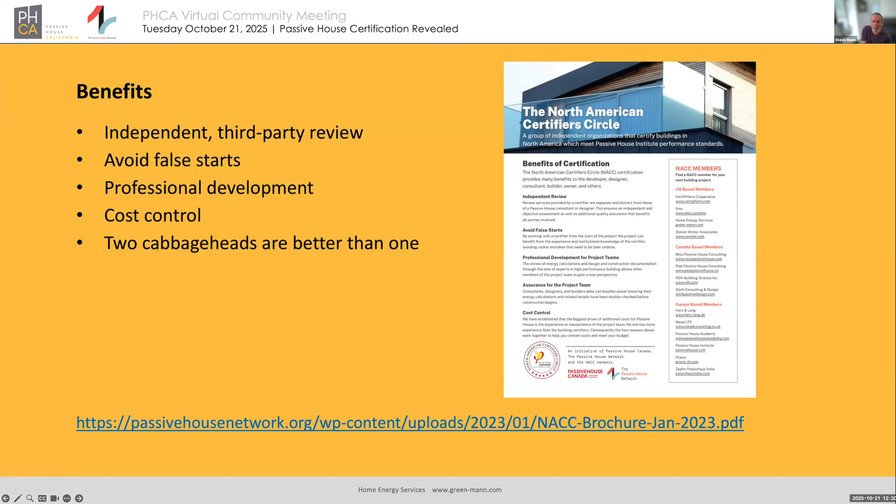Okay, the players — I've already mentioned it. There's a homeowner, that's usually who we contract with, because again, we're a third party arm's length relationship. There's going to be at least one designer or architect, there's going to be the nerd, the PHPP creator, often called the consultant, but they don't have to be certified or trained in anything — if they know how to do it, that's fine. There's going to be a builder, there's going to be subcontractors, and then there's going to be a certifier.

This is something I'm presenting in terms of how I like to operate. Every certifier is different. The way I like to operate is to have one primary point of contact so that I'm not talking to six different people to collect what I need. That doesn't mean I don't talk to everybody on the team if necessary, but I don't want six or eight people sending me documents, because chances are they're all going to send me the same stuff, and then I have to weed through it. So I like to have a manageable process. That's one thing that makes this go smoother.

We get involved typically at the very beginning, briefly. We take a quick look at the project, and this is where we can do value-added engineering and a certain amount of guidance. We are not designers; we don't get involved as designers, but we can get involved at schematic design to assist if people want that. If you really want to get formal, we can do something called a design stage assistance letter, which is basically a formal letter saying, okay, I'm a certifier, I've looked at all your plans and what you've got, and if you build the building according to the documents I looked at, it will be a certifiable building.

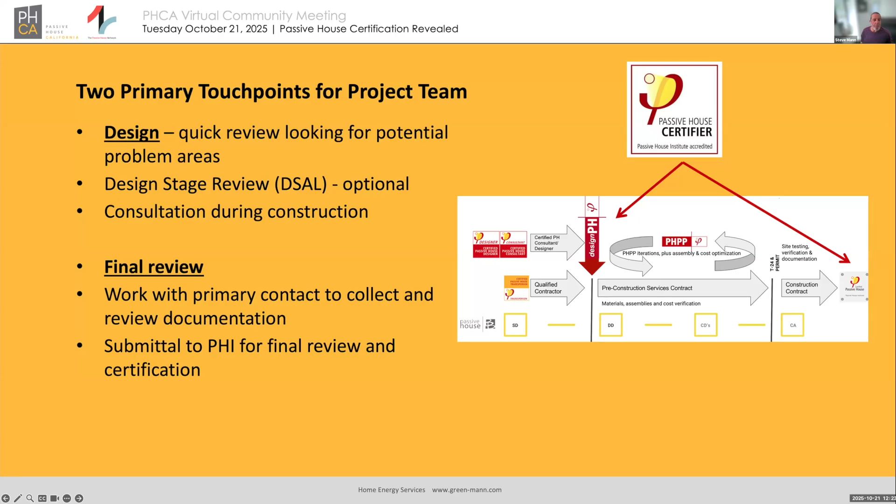Let's talk about the big lift, the documentation requirements. There are basically six categories here. If you want to find out more, you want to download these two links. One is the building criteria—this is what you have to do in order to get a certified project. And then the second one, the Passipedia document, gives example documents, these are submittal requirements.

Question from Vincent: are we more involved at the design stage for a remodel, e.g. to provide pre-certification? No, not really. Most of my projects are new construction. I've got a couple of remodels I'm doing, and the amount of involvement as a certifier is about the same. It's not a big difference, really. I'm trying to think if that's a false statement, but no, I think that's a pretty accurate statement from my experience.

My remodel experience is limited. I'd say maybe 1 in 10 projects is a remodel. I'm doing 2 retrofits right now, maybe 3, maybe 4—I have to go back and look at my project list. So yes, I am doing some.

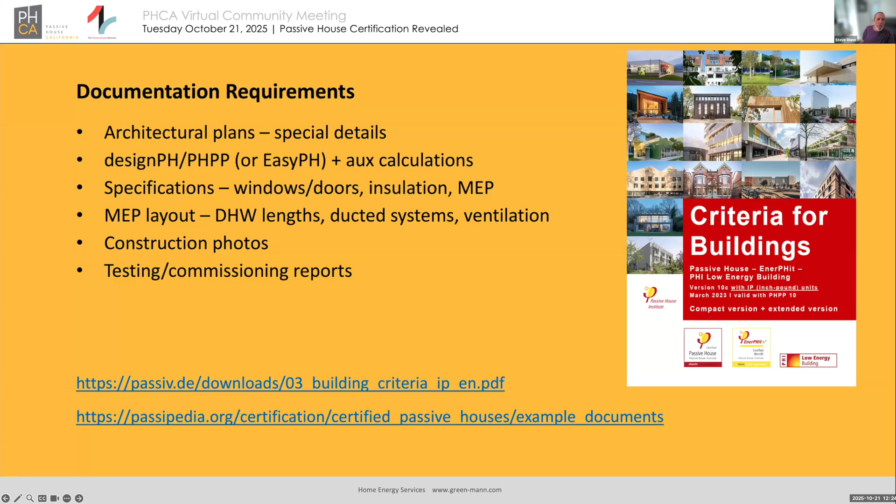Okay, documentation. That's one thing. I'm just going to go through this. There's the documentation, there's the modeling plus auxiliary calculations, there's specifications, there's a bunch of MEP stuff, construction photos, and testing and commissioning reports. Those are the categories of things you need to submit to a certifier.

Okay, architectural plans. The site plan has to have—and again, these samples I'm showing are from this second document, the Passipedia document—so you don't need to study these slides, there's more information in the Passipedia document. I'd recommend you download it and read it.

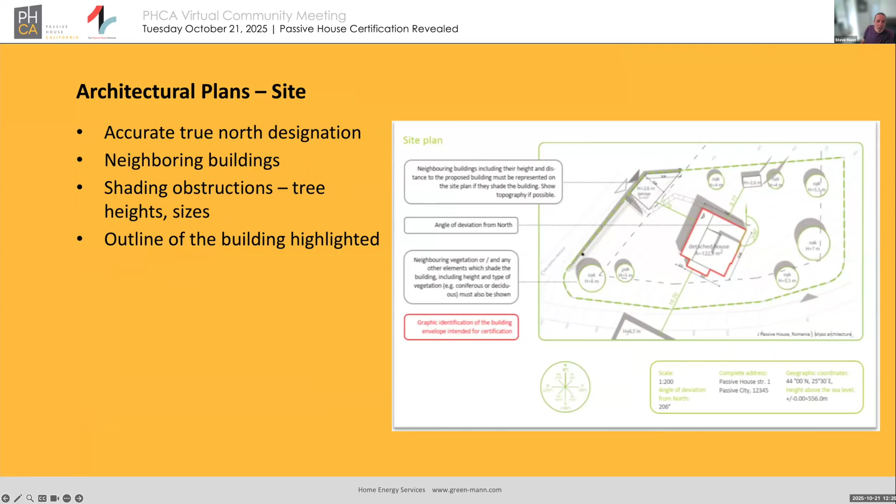Okay, you have to have a true north designation. You have to show neighboring buildings. You have to show shading obstructions and an outlining of the building highlighted. For the floor plans, you need to outline the thermal envelope and the air barrier, and we typically recommend you do it in separate colors and identify them.

Okay, and this is just one sample. We would like to see dimensions for the thermal barrier because that's really what we measure when we're certifying a building, and that's what the consultant should be measuring. Sometimes you get that, sometimes you don't. As a certifier, you learn to deal with it.

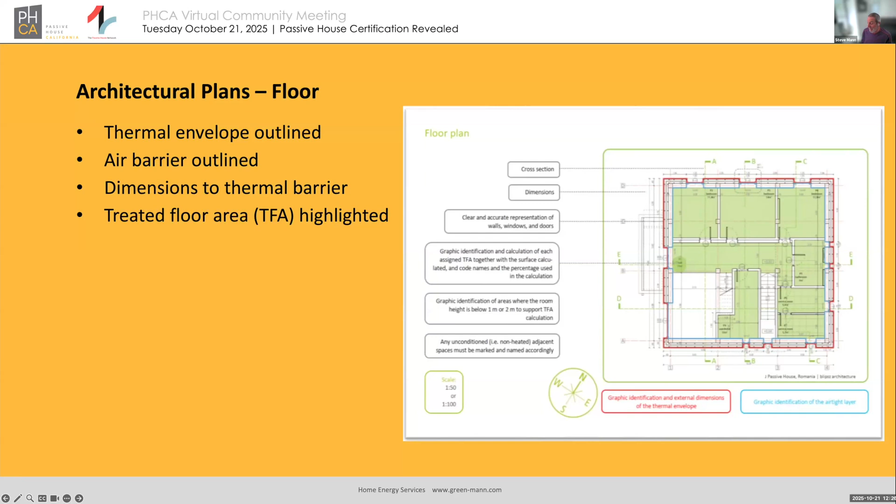The other thing we want to see is a treated floor area that's highlighted. Treated floor area is an interesting little art and science all to itself. You just have to figure out how to do it, I'm not going to delve into it any more than that. But we need a clear representation of what the treated floor area calculations are. We don't want to do those ourselves. The consultant or somebody needs to do that and make it clear, because virtually all of the calculations in the PHPP rely on an accurate treated floor area number. So that's got to be 99 to 100% accurate, and we check that very closely.

On the sections, same things. We want the thermal barrier and the air barrier outlined. We want materials listed - this can come up on the sections or on the details, and I'll show you details in a minute. Again, dimensions of the thermal barrier. And we want to see materials here that match the materials in the details. If I see you identify, say, rock wool insulation on the outside in a section, but then in the details you call out plant-based material of some kind, it's clear to me that somebody's not keeping stuff up to date, and I don't know what you actually built. To me, that's a red flag that says somebody's not taking care of business, so I'm going to look at things a lot more carefully because it's an indication of sloppy work. I want the materials to match all the way through.

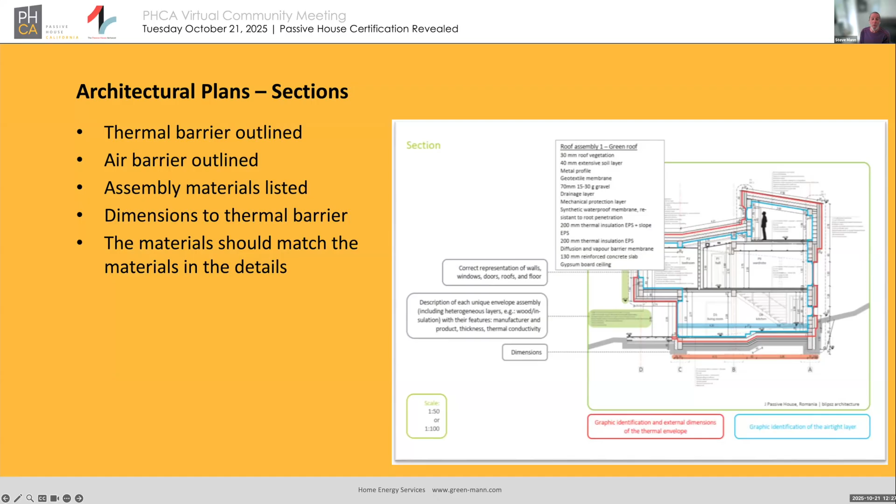Here's a sample of some details. We need to see details again with the thermal and air barriers marked, the materials called out, dimensions, especially on door and window details. We want to see reveal dimensions because they can have a significant effect on your solar radiation. And again, the materials in the details should match the materials in the sections, and as I'll see later on, the materials in the specifications.

Mark, is this level of detail required for all projects, including EnerPHit? It seems like although this level of detail is required, it's a major barrier to scaling passive house. Good question, Mark. It actually is a bit of a barrier initially.

It is required because we need to know exactly what's in the building, in all places. What I've found is once a project team, especially a passive house consultant or an architect, if they're working together, once they've done this a few times, they develop a set of templates, a set of standard details. It's just like structural engineers - you get a set of structural plans, two plan sheets that are project specific, and then a third plan sheet that is basically boilerplate stuff that may or may not totally apply. The architects that I work with and like working with are the ones that know how to do this, and it doesn't present a great burden to them. But the first time you do a project, and I've done this with some architects as well, it can be a pain in the butt, but it is pretty much required.

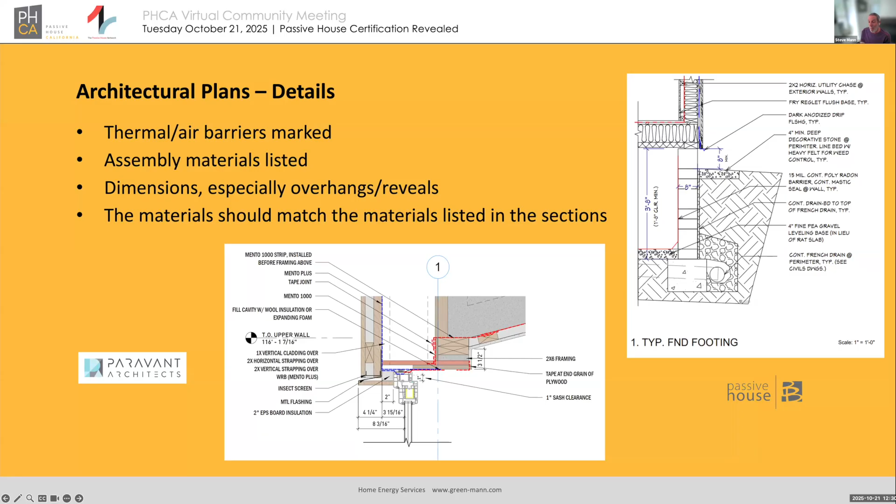Okay, the nerdy stuff. We need a PHPP - that's the core numerical crunch document. It's got to be complete, it's got to be error-free, including the plausibility check. For the passive house nerds out there that know about PHPP, there's a check worksheet that contains errors - if there's no errors there, that's great. But there's a secondary section called a plausibility check that has additional commentary generated automatically, and somebody has to address those comments. It might be things like questions about massing, or a large percentage of windows, or a small percentage of windows, and that needs to be addressed in order to get through certification.

You need a clear, accurate treated floor area calculation, a clear volume calculation, and in many cases, a ventilation design, which for single family is actually quite easy to do in most cases. A lot of my architects actually do that, and as a consultant, I do that too.

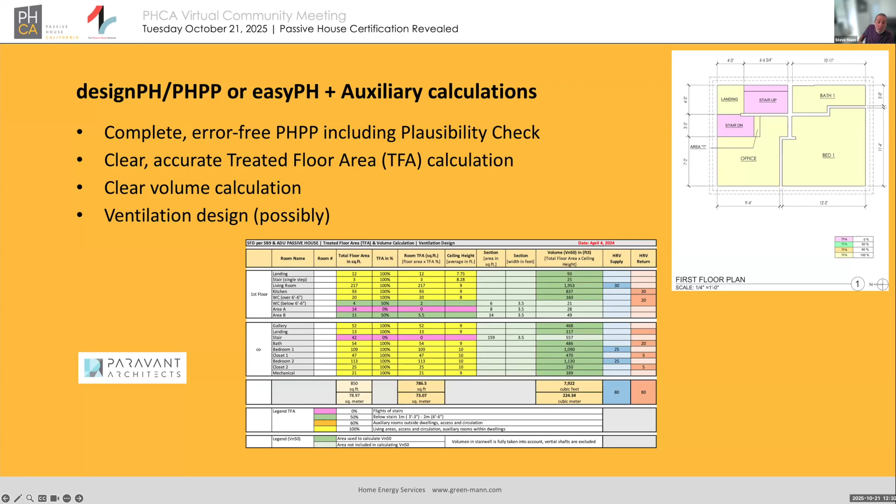Shading detail. Shading can be a real pain, unless you're in the plains in Kansas with nothing surrounding you at all.

Generally, I have to go get types of shading information from the project team. Now, the site plan should have some stuff, but generally they're not that accurate, and it's not going to contain all the information you need. I need to see tree heights and the breadth of the tree envelope. So I usually ask the project team to go out, take photos, measure the heights, put together a worksheet, and ideally put it into Design PH.

For my money, Design PH is the only way to do accurate shading. And I'm at the point where I pretty much will not certify a project without a Design PH model, because there's just too much extra work involved, both for the nerd doing the number crunching and for me as the certifier. It especially has to do with things like terrain. There's really no good way to do terrain accurately with a secondary spreadsheet or something like that. It just doesn't work. This is my personal opinion.

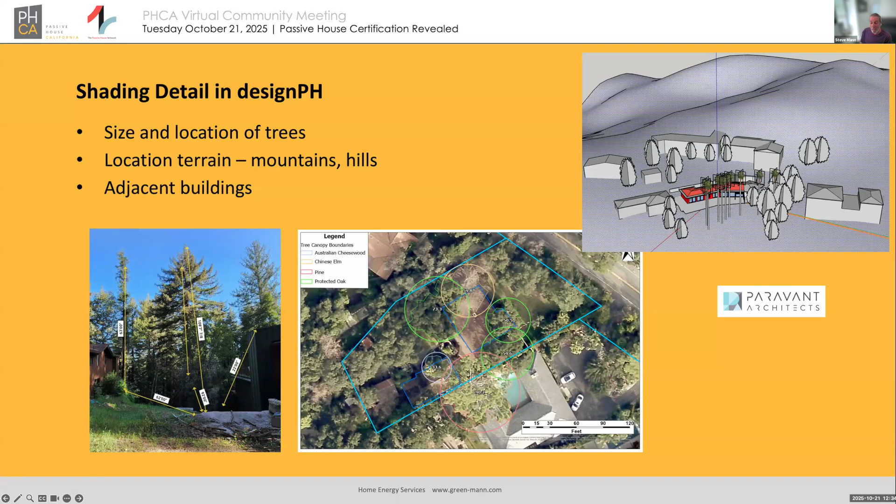There is a BC Canada book. Yes, haven't seen it, don't look at it. It might actually apply. To my mind, every project is different, so the details are always different. And if a project team pulls stuff from a detail book, great, they can refer that to me and they've got the information. I've never had that experience though. Every project team does things differently, in my personal experience.

Thermal bridge calculations - you could talk about books for thermal bridge calculations too. In theory, they are out there and you can pull from them. I've never had a project team do that either, because every project is unique as well.

I encourage the team to put together a thermal bridge booklet where they identify all the thermal bridges tied back to the project details on the plan sheets. That's going to be thermal bridges plus door and window installations, plus building intersections, change of insulation layers, any place where there's a potential thermal bridge. I like to see a catalog, and then depending on the nature of the thermal bridges, I ask them to tie those to a set of thermal bridge calculations.

Ideally, the best thing to do is a thermal bridge free design, which is possible. In fact, I've had several teams able to do that. You have to go into the project at schematic design thinking, I'm going to do a thermal bridge free design, and that sort of comes out of it.

I'd say that's maybe a quarter of the projects I've done. Other than that, you do need to identify thermal bridges, document them, calculate them. And this could require a third party to calculate those. There aren't a lot of people that do thermal bridge calculations and do them correctly.

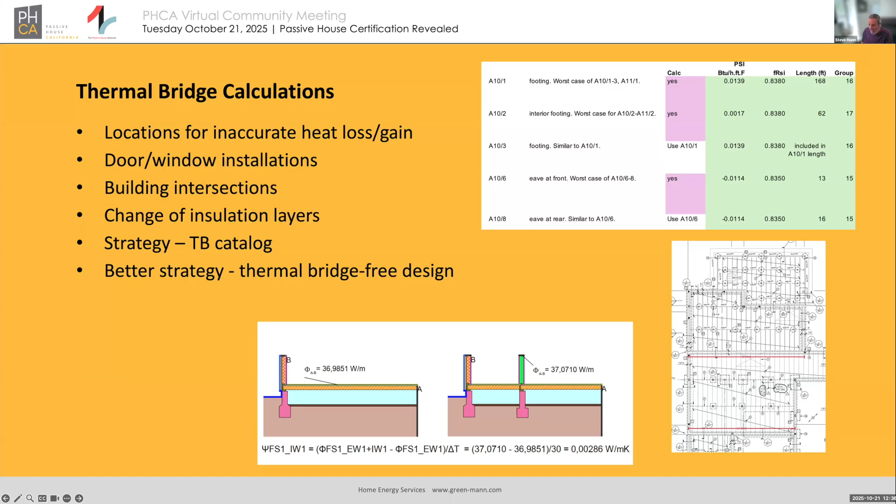Doors and windows, we need complete specifications. We need a schedule on the plans. We need a window order and/or shop drawings.

We need consistent identifications and sizes. When I'm an auditor, I'd like to see a clear audit trail from the elevations to the project door and window schedules, to the shop drawings, to what's in the PHPP, to what's in the design PH. I'd like to see people use the same identifiers for every one of those, so that if I see something in the shop drawings, I can go find it in the PHPP easily because it has the same name. This is not hard to do.

It requires thinking about it while you're putting all this stuff together, starting with design and then all the way through project delivery.

Some window manufacturers actually pull window IDs from the plans. They're my best friends because they make my life easy. Some of them don't. I'm going to look for this information, and if it's not there, somebody on the project team is going to have to provide it to me.

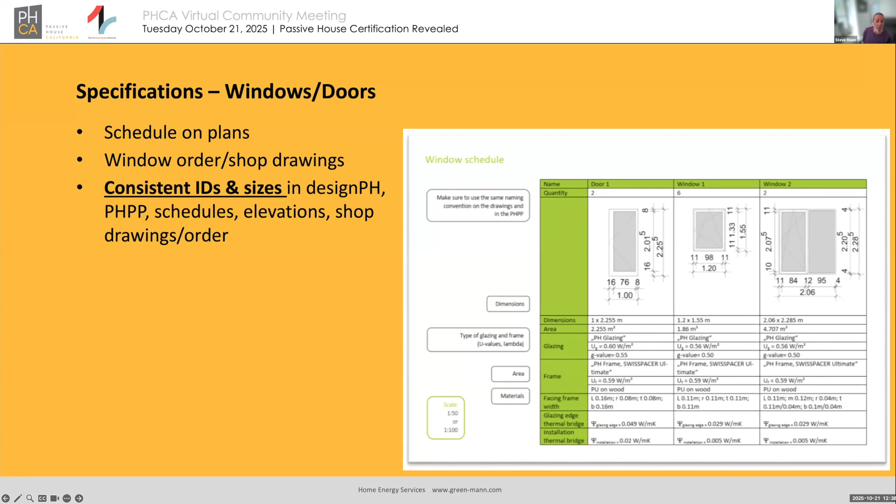We need glazing specifications, frame U values, PHI certifications if there are any, and Psi-install values if they're needed, and generally they're going to be needed. PHI is getting stricter about those.

NFRC numbers don't count. In California, the California Energy Commission requires you to use NFRC window and door values for energy code calculations, and I oftentimes have window manufacturers or project teams send those to me. I respond saying, nope, they're irrelevant, I need more details, and then I tell them what's needed. Oftentimes the window manufacturers do have some of this stuff. Eventually they provide all of it, or somebody provides all of it, but it's got to be very, very complete.

What's different about thermal bridge evaluation for California? Nothing. Why couldn't we use the PSI numbers? You can, if they match the project and if they're calculated properly.

Vincent asks, is there a directory of thermal bridge calculators? Do you mean people that do that, or software that does it? If you mean software, there's really only three products: Flixo is the most popular one, Therm is the second most popular one, and there's another product. No, there is not a directory of people.

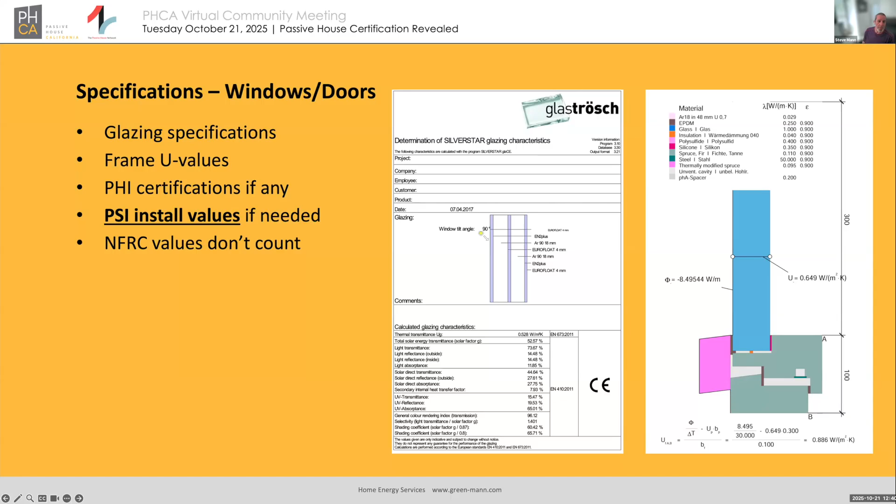Very detailed specifications on doors and windows. For insulation, we need to know exactly what's being installed.

Robert mentions PH Canada offers calculations. So does Passive House Institute too, if you want to go with them. I've used them on one project, they do fine work. I've never used PH Canada.

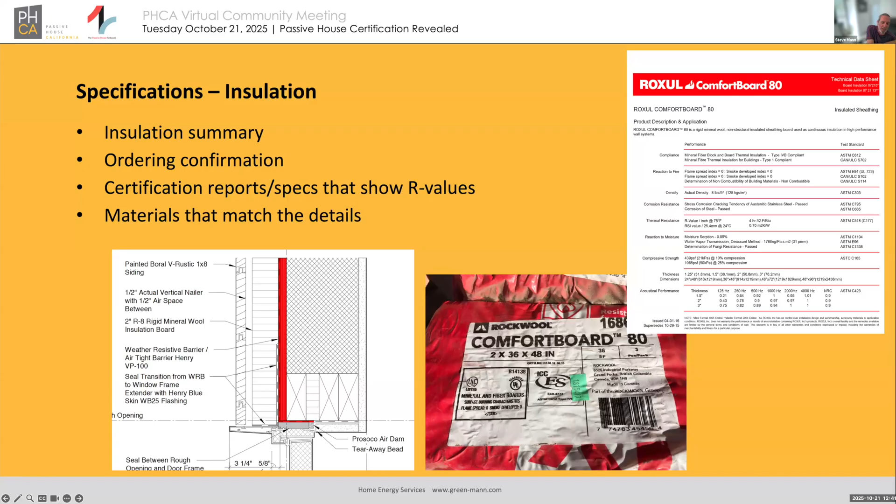For insulation, we need a summary of what's installed. We need stuff called out on the details. We need specifications for each insulation product, with either a certification report like an ICC-ES report, or legitimate, well thought out specifications that show the R-values. Again, the materials in the details need to match the specifications you provide, and need to match the pictures of the installation delivered on site. We need a clean, clear audit trail from concept through to execution.

Mechanical systems need similar depth. We need all the hardware specifications. We need PHI certifications if they exist, and they probably will for the ventilation equipment. We need a ventilation layout. We need a domestic hot water layout with pipe length calculations.

If you had ducted heating and cooling systems, we need the duct layouts. And we need purchase documentation showing that yes, you said you were going to install this hot water heater, here's the purchase documentation. And in the photos, we're going to want to see a picture of that same piece of equipment.

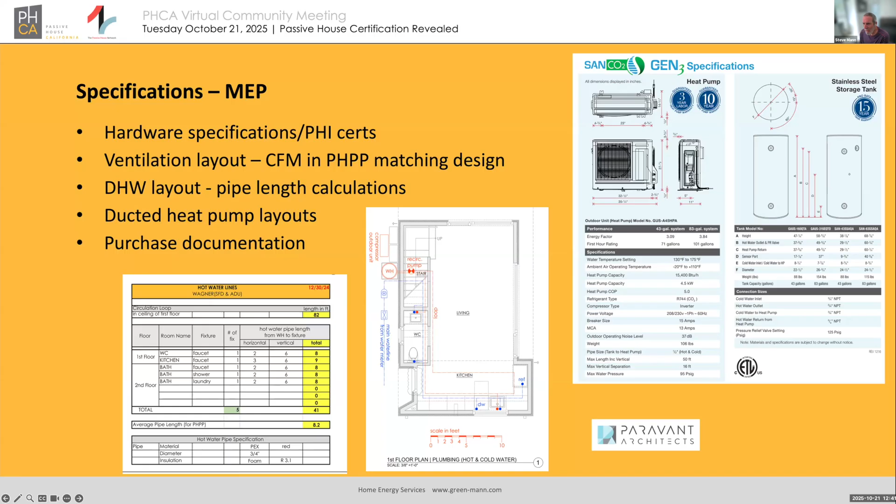Then for the builders, we need construction photos. Here's a link to an official PHI list of construction photos. Every certifier has a different way of approaching construction photos, I know this from experience. Some are more complicated, some are less. I think if you use this official list, you should be in pretty good condition.

Essentially, what we're looking for are photos of the air sealing details, the insulation details with rulers showing the depth of the insulation, window installation, the mechanical installation, and shading obstructions. For shading, this means surrounding shading. An official requirement for the photo list is photos of the building surroundings taken from the building surfaces to the outside, so we can double check all the shading information previously seen in the modeling.

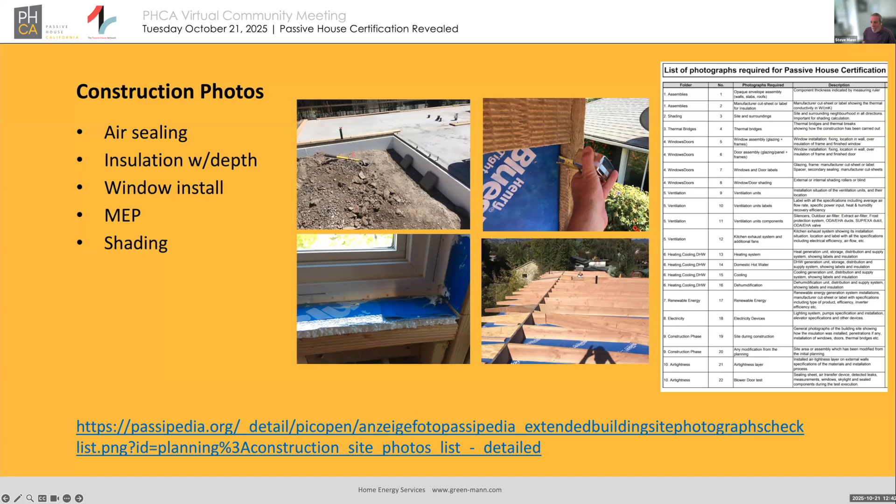Testing and commissioning reports: we need a blower door test, and it has to be done using ISO 9972 method 1. Nothing else is acceptable. We need an official signed report that says this was done using the ISO method, and it shows the calculations and all of that stuff.

For the ventilation, we need a signed ventilation report by somebody. Now, there is no such thing as a certified ventilation technician. Well, we can slice and dice that, what I just said. But anybody who has the equipment and is qualified to do these measurements can do that.

I've had passive house designers do the ventilation commissioning. I've had California HERS raters do the blower door testing. I've had people that just have the equipment do the blower door testing. So as long as they know what they're doing and can clearly show that, currently that's okay. There's no qualifications, no written qualifications. And the reports have to be signed by whoever did them.

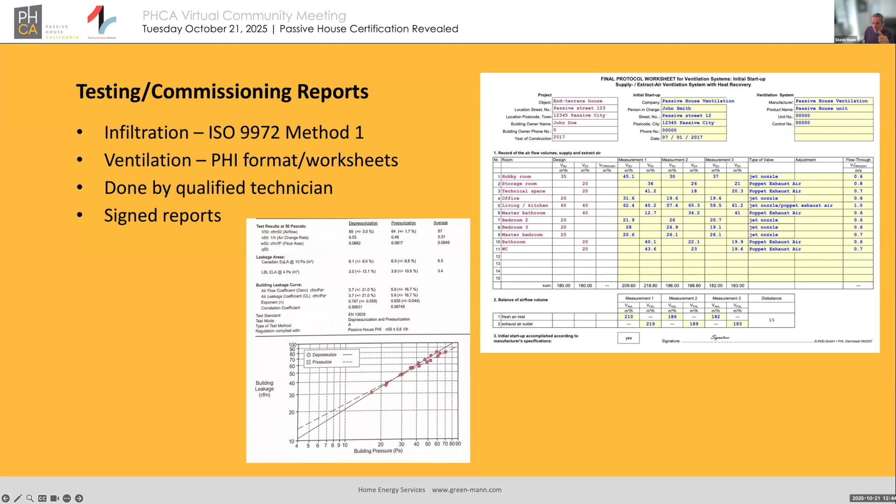All right, so this is the quick and dirty. This is everything you have to do. And like I said, there's nuances that I haven't really touched on. They come up once you dig into a project.

So if you want to make this as simple as possible, here's a few recommendations. This is my personal take. Everybody's different, every certifier is different, every project's different. This is what I like to see.

One point of contact. That doesn't mean that I won't talk to the other project members, but I'd like to have one person that's generally responsible for delivering the documentation to me. It can be the designer, the architect, the nerd, the consultant, it could be a secondary team member. I don't care. I just don't want to have extended conversations with 5 or 6 people about the documentation. It's not an effective use of anybody's time.

I would encourage you to ask the certifier how they want the data delivered. Some people like to set up drop boxes - that's my preferred method. Some people just like to have documents sent by email, I'm okay with that. Some clients like to set up their own Dropbox and manage it on their end. I prefer to do it on my end, but I'm open to suggestions. But we need to have that conversation to make sure that whatever method we agree on, we're going to use.

I'd like to see, as a certifier, everything at once as much as possible. Now, that's definitely not possible - there's always going to be odds and ends, bits and pieces. Some things get done in big chunks, sort of like architectural drawings - send me all those at once, especially ones that are complete and accurate and finished. All the modeling stuff, send me all that at once, but don't send me a designPH and then a SketchUp and then a PHPP or an EasyPH over 4 or 5 days. I'm not going to look at them. And it's easy to get versions messed up.

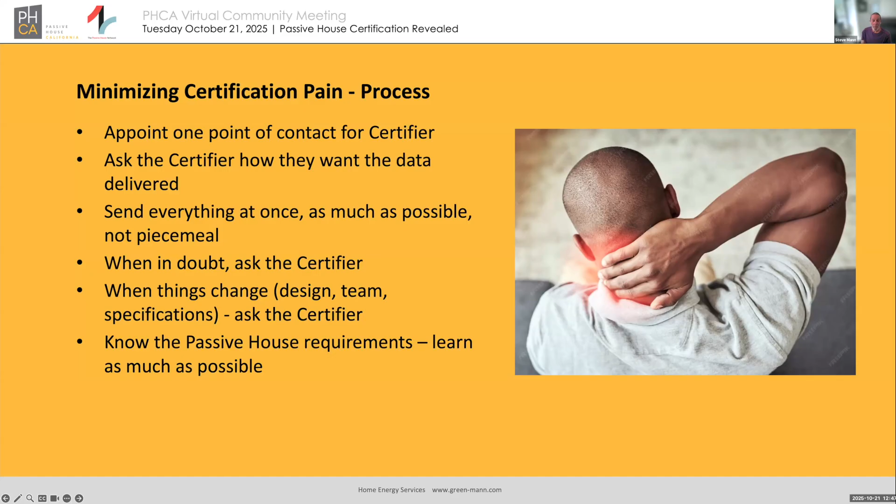In terms of documents, keep everything up to date. Everything, please. Don't send me a set of architectural drawings done 9 months ago and a design PHPP done 2 months ago that don't match. If they don't match, I'm just going to send them back and say fix it. It's much easier for everybody if you make sure everything's up to date and in sync ahead of time.

I already mentioned I'm going to need to see an error-free PHPP or easyPH, and the check worksheet and plausibility check comments have to be addressed. All the documentation for the certification guide, which I just blasted through quickly, I'm certainly happy to talk about those requirements. Your consultant should be familiar with those as well.

This is one of the biggest ones: consistency across everything. I'd like to see a clear audit trail for everything. Treated floor area, clear audit trail, clear documentation, so I don't have to dig around and ask how you calculated that. You show me how you calculate it. I talked about window IDs all the way through everything. I'd like them to be the same. That really makes my life so much easier.

Naming conventions, same deal. If you call something rock wool in your details, it's great if you don't call it mineral wool in your PHPP, but call it rock wool. Be specific.

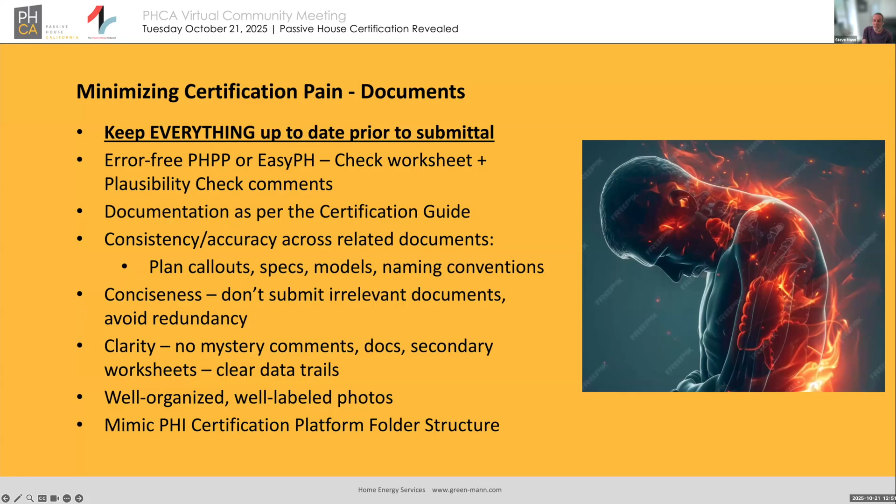In terms of all the documentation as it gets sent to me, it's great if it mimics the certification platform, if we're using that, which I prefer to use. The certification platform is an online thing that Passive House Institute does, and it has 10 categories of documentation requirements. This gets set up by the certifier if the certifier wants to use it, or the project team wants to use it—you don't have to, but it's a great organizing tool.

I didn't used to use this so much, but the more certifications I do, the more I use it as an organizing principle. I can set it up, I can upload documents to it, the consultant can upload documents to it—we have to negotiate who's going to do that. I prefer to do that, but the official consultant can too. I can actually assign multiple people to put stuff in here, but I'm not going to do that. I want one point of contact.

This provides—you can't really see it—but it's like a tree structure. As you go down into the tree and the details, it calls out individual documentation requirements and descriptions of things, like for the passive house planning package, this is the stuff we're looking for, or for the window specifications, this is the stuff we're looking for. It's a great organizing principle. So this is the platform—it's a great thing to use. It's not critical or required, but I recommend it.

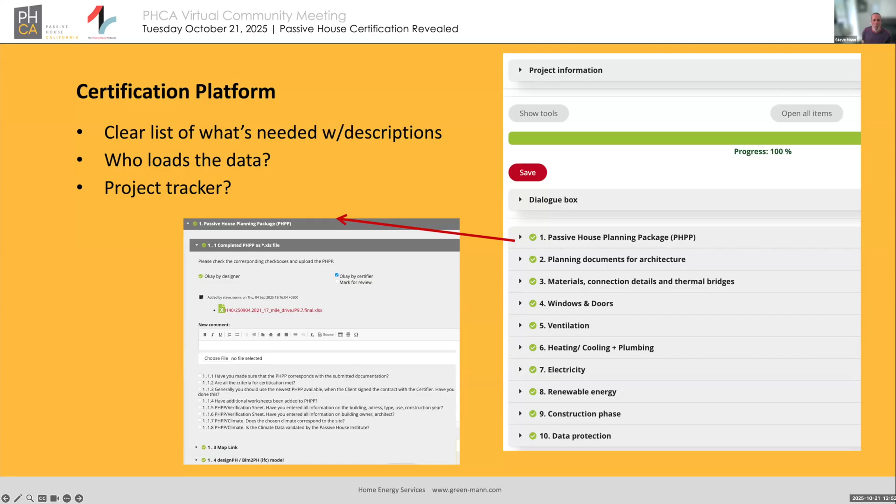Finally, here's a quick and dirty summary. Use the platform as a guide to submittals if you're inclined to do so. When in doubt, ask your certifier. You can ask him anything you want.

For the nerd on the team, I would say use designPH, use EasyPH if it's appropriate. It's not appropriate for all projects, but I would encourage you to definitely use Design PH. For the architect, refer to the certification guide for the plan requirements, especially if it's your first project, because you're going to find you're going above and beyond what you're normally doing. Provide clear and adequate details.

This will probably be the biggest pain for your first passive house project, but it's necessary. And for the builder, complete well-organized photos and appropriate commissioning reports. So that's my personal point of view on how to make a certification go as easy as possible.

Certification is an extra layer of complication on top of just designing and building a project, but there are benefits, as I pointed out early on. It's great to have extra people looking at the project. It's great to know that the homeowner is actually getting what they paid for. And if you don't certify the project, it's all just arm waving and assurances.

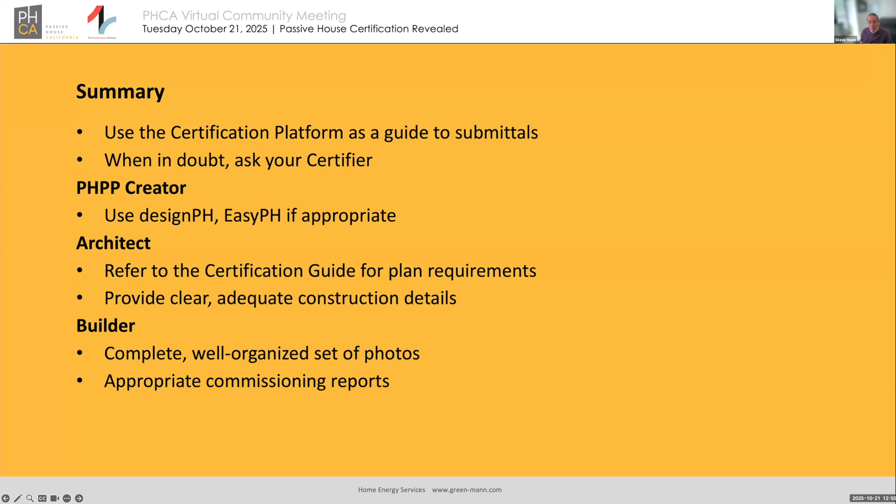So certification is a great thing. I recommend it to all my clients, and about half of them do it. And I don't do a hard sell on it. It's a choice.